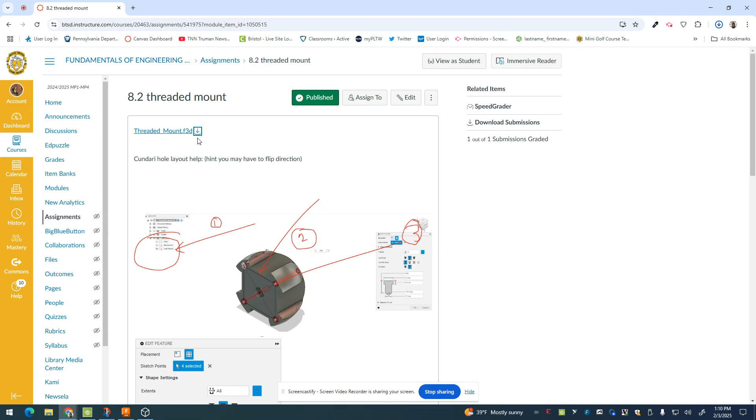This is a Fusion file, so I'm just going to download it by hitting that little arrow. And then I'm going to go through and work on the directions, but I have a couple screenshots here to help us out as we go through, just from doing this before.

So I'm going to go into my Fusion, and I will go into a new, for me, I'm going to go into my admin, and then from there I will upload that file that I just downloaded off of Canvas. So that's going to upload, open the design.

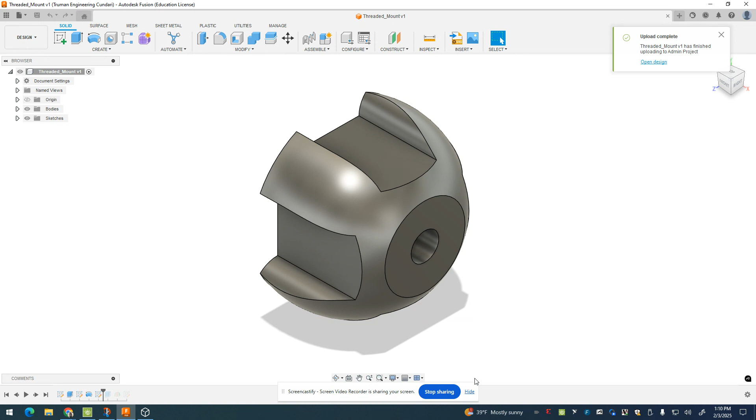So they're starting us off with this, and we need to figure out how to do what they want us to do. They're putting threads and things in there. So, oops, sorry, that's a different assignment, different class.

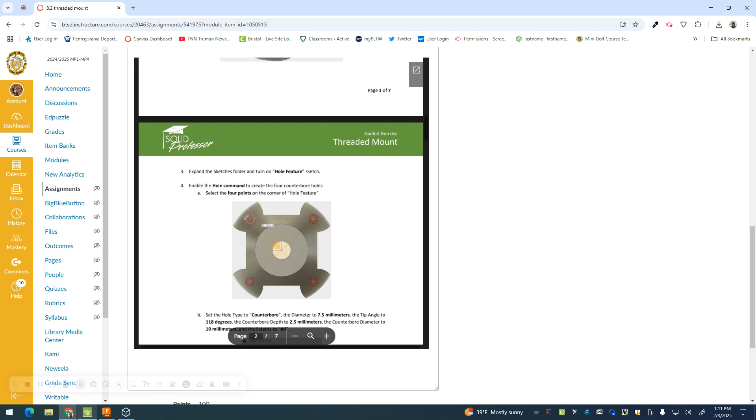Okay, so here we are, and it says upload the design, we've done that. Expand the sketch folder and turn on the Hole Feature sketch. So I'm going to go here, I'm going to bring this down here, and I'm going to go to the Hole Feature and turn the eyeballs on.

And it says select the 4 points on the corner of the hole feature. Set the hole type to counter bore, diameter 7.5 millimeters, the tip angle to 118 degrees, the counter bore depth to 2.5 millimeters, and the counter bore diameter to 10 millimeters. Extends to all. So this whole thing that they have here is a little different physically, which is why I have that screenshot on Canvas.

So let's see if we can sort it out. So we're going to do 4 drill holes, and we're going to do counter bore.

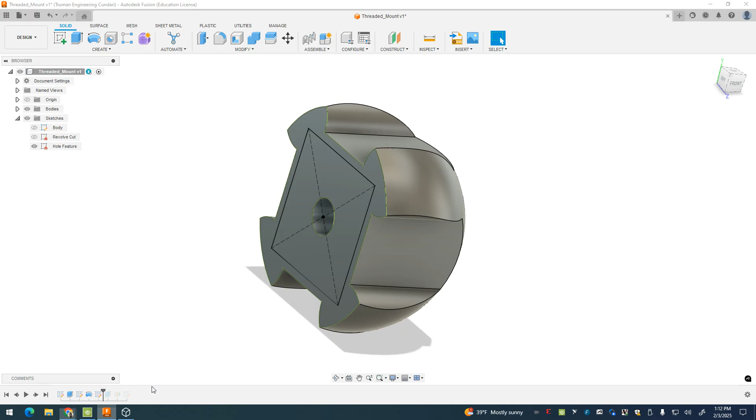So that's kind of the important part right now, is that we go here and we go to hole. We're going to put one here, one here, one here, and one here. So then I'm going to look over at the rules of what I have and what needs to be done.

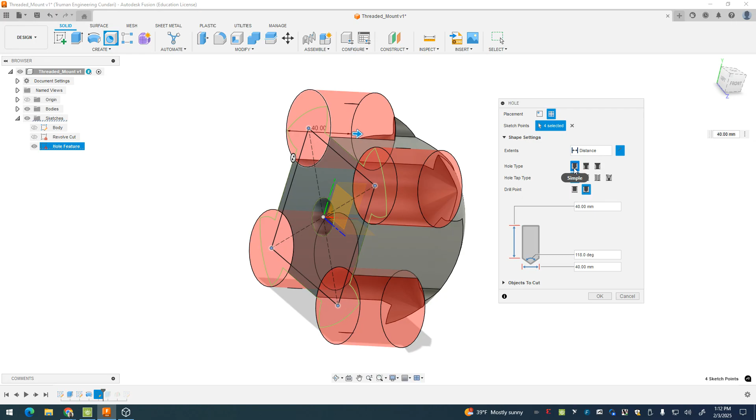So it says we need counter bore. So if I go into this top one here, hole type, simple counter bore, countersink. So let's click it over to counter bore.

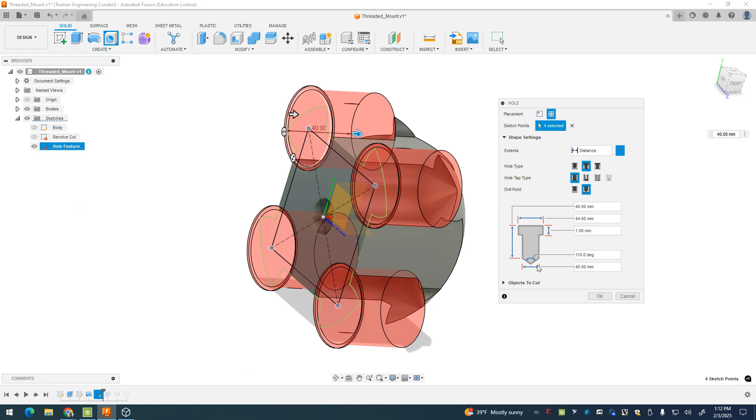And then it says the diameter is 7.5 millimeters, but then the counter bore diameter is 10. So let's do that. So we have this diameter is going to be 7.5. Oops, I didn't mean to hit that. Sorry, double click. Okay, so 7.5.

This diameter here is 10. And then it says the depth here was, I want to say 2.5. Let me just make sure. Yep, 2.5 and 118 for our degrees. So let's do 2.5. Look, this is already 118.

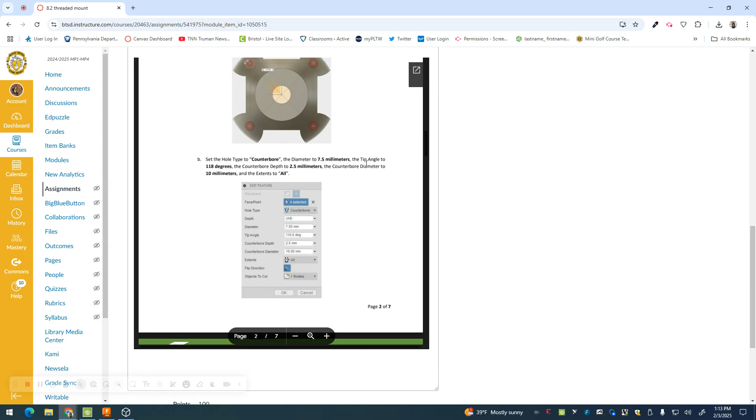So then the only thing I have to worry about is the height of the actual hole. Let's see if they give us one. It says extends all. So that means we're going to go through this part here, drop down. Does it give us an all option? No. There's got to be another place for us to, here. So under extends, we're going to go to all.

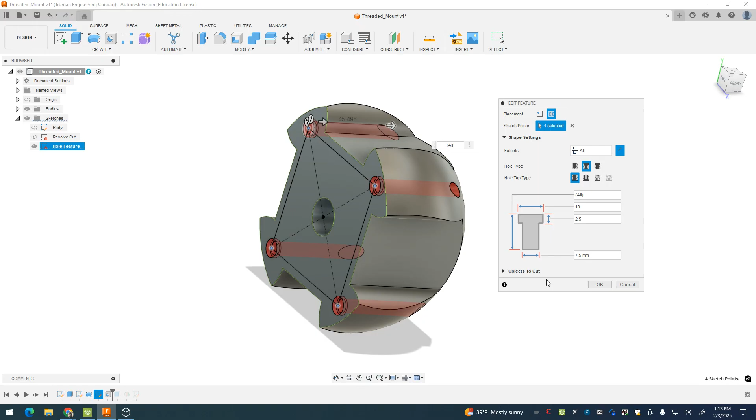Okay, so that is our drill hole there. Anything else weird it has us do? No, that's it. So then it says make sure the command is going in the correct direction, and then click OK.

So that part is good. So now it says enable the shell command to hollow out the underside of the model. Select the back flat face of the mount as the face to the shell. So we're going to go ahead and hollow it out, 2.5 millimeters.

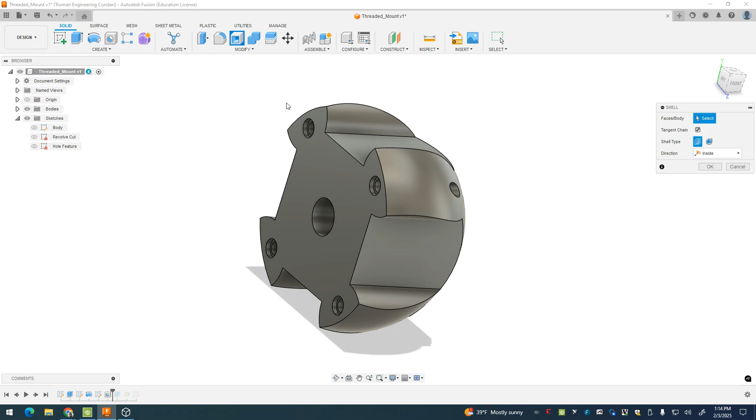So I'm going to go to this thing called shell, click here, bring that in. You can kind of mess with this here and it's going to get mad at you. So just do 2.5 and then it'll be okay. It's because it wants to do like more or less and then it can't.

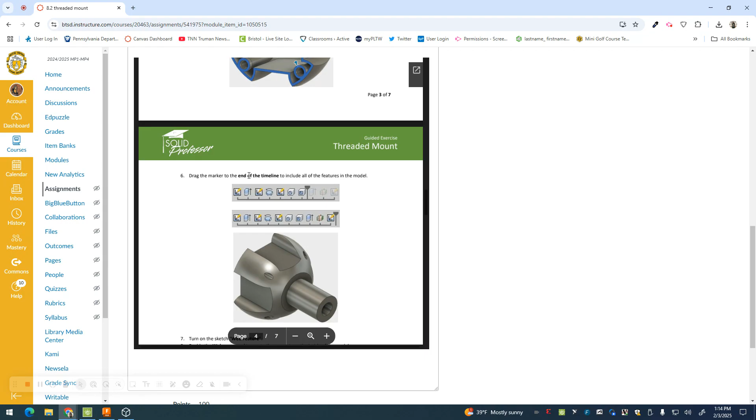How's that look? Yeah, that looks like what they have. Okay, next it says drag the marker to the end of the timeline to include the feature in the model. So that means we're going to go here and we're going to go down here and pull this forward.

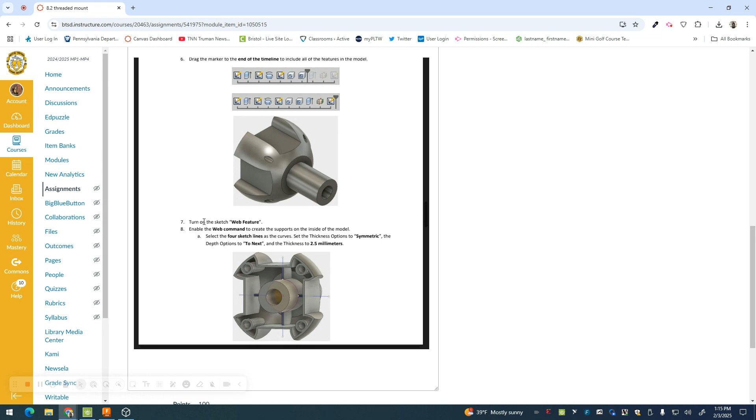Now it says turn on the sketch web feature, enable the web command to create the supports inside the model. Select the 4 sketch lines as the curves, set to thickness symmetrical, depth to next, thickness to 2.5 millimeters. So we're going to go in here and turn on the web feature.

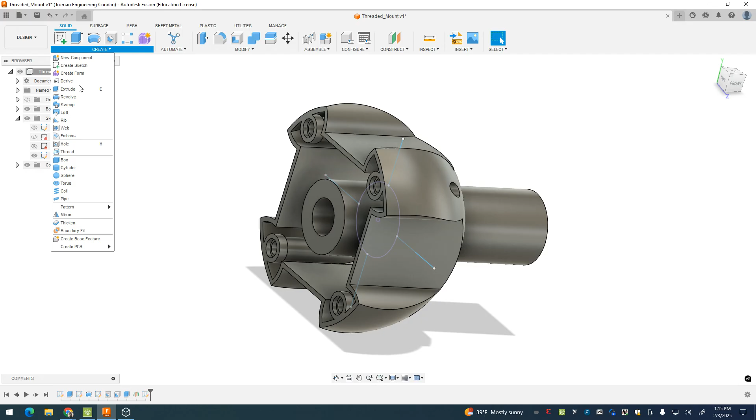We're going to go to web. We're going to roll this so we can see what we're doing. We're picking all of this. I feel like the circle should be picked too, but I don't know if that's the case. And then we're going to do symmetric, and we're going to say to next.

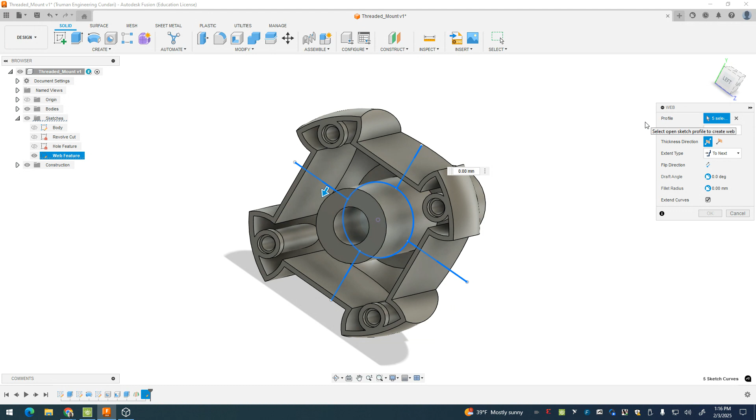And the thickness is 2.5, so to next, 2.5. Okay, is that what it looks like, or did they not do the circle? Let's see, I just don't know if the circle should be included. It says the 4 sketch lines, so that does not include the circle. So let me take that circle out.

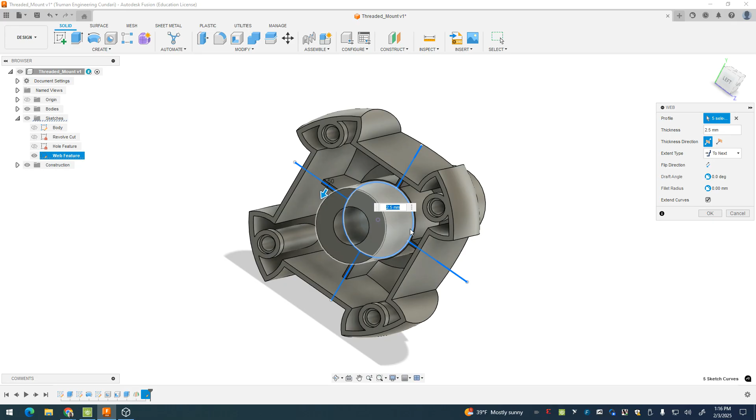So I'm going back up here, and I'm just clicking on that circle if I can get it. Can I get rid of it, or do I have to go out? Let me just do this.

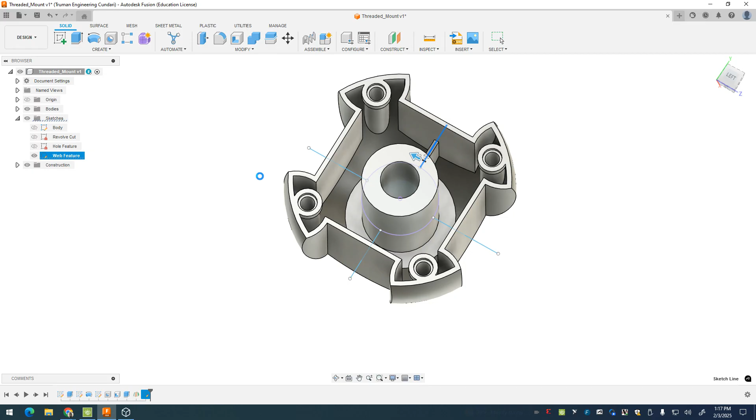Oh my gosh, it's got issues, guys. My computer's frying itself. Okay, let me X out of that. Cancel it because it's lost its mind.

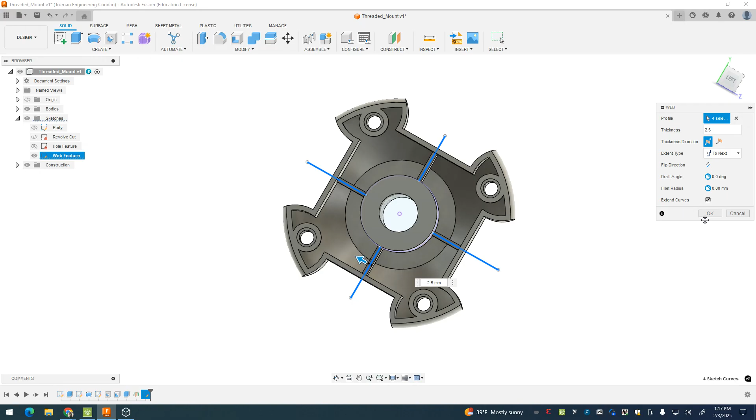Okay, so we turned on the web. Sorry, I'm going to go to web. Put this line, this line, this line, this line. We're going to make it 2.5. Make sure this is symmetrical. Make sure this is to next. And hit OK, that's what you have for that.

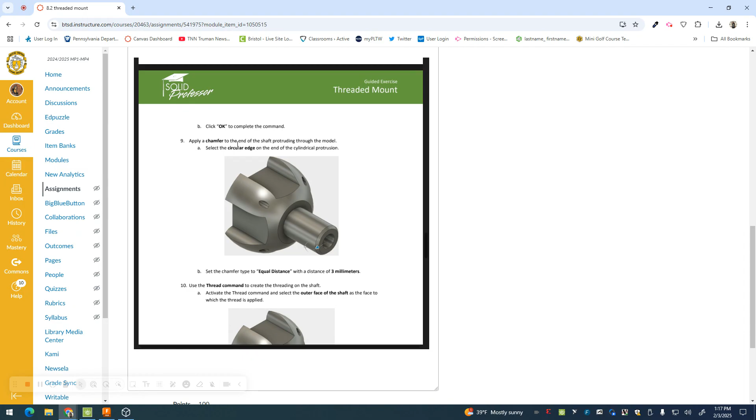Okay, next it says apply a chamfer to the end of the shaft protruding through the model. Select circular edge and make it equal distance 3 millimeters. So here we're going to go ahead and do a chamfer on this side. Chamfer, do this circle, go in 3 millimeters, equal distance, and hit OK.

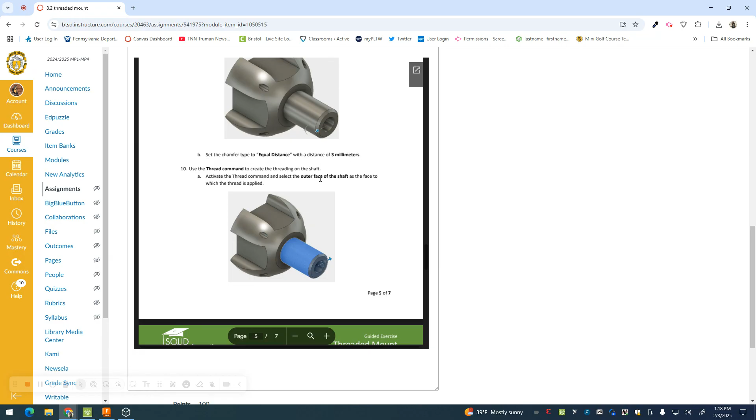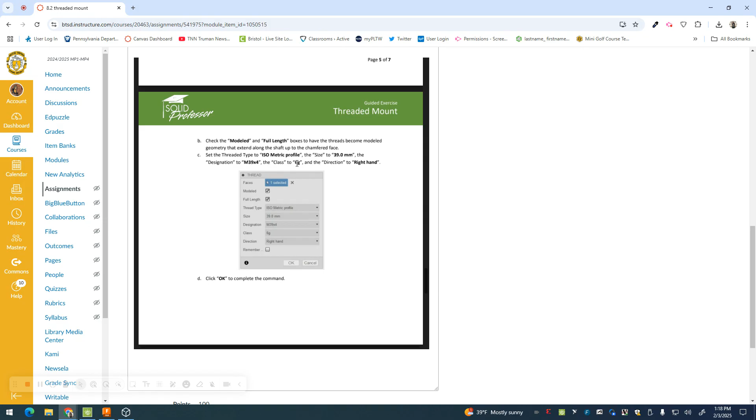Next it says use the thread command to create the threading on the shaft. Activate the thread command and select that face. Check the modeled and full length boxes we want ISO metric profile. The size is 39.0 millimeters. The designation is M39 times 4. The class is 6g. Okay, so let's see if we can sort all this out.

This is the thing, when you do threading, is threading here? Yeah. Picking this, so then it has all those things. ISO Metric profile, I'm going to add modeled. If you don't click modeled, you don't actually get to see what's going on. 39 millimeters, M39 times 4, 6g, right-handed. I think that's everything, probably the last time I did a thread. Yep.

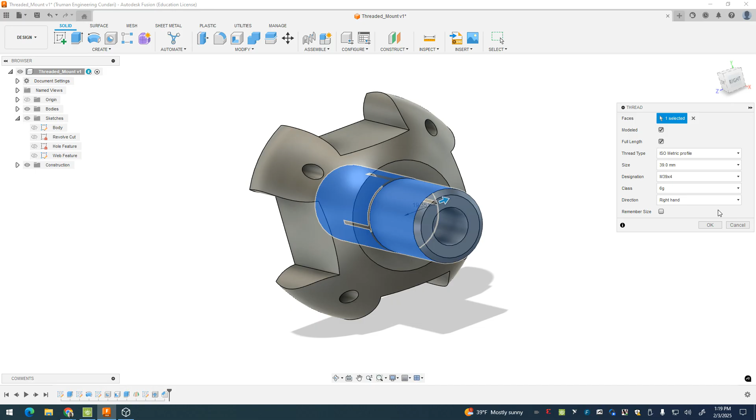So let's look at it. Let's hit OK. And it didn't do anything. That's really annoying. Oh, it did, it threaded the inside and not the outside. Maybe that's the way it's supposed to be, but I don't think so. Let me double check.

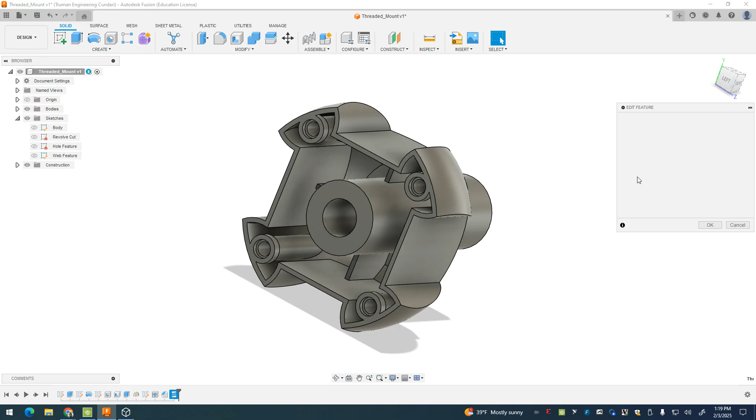So it's supposed to be threaded. We go all the way to the very top. Yeah, it's supposed to be threaded there. Let me go back to my threading. And then, is there a way to... Oh, now it's fine. Okay, so it was a glitch with the computer program. No, it's lost its mind. Good to know.

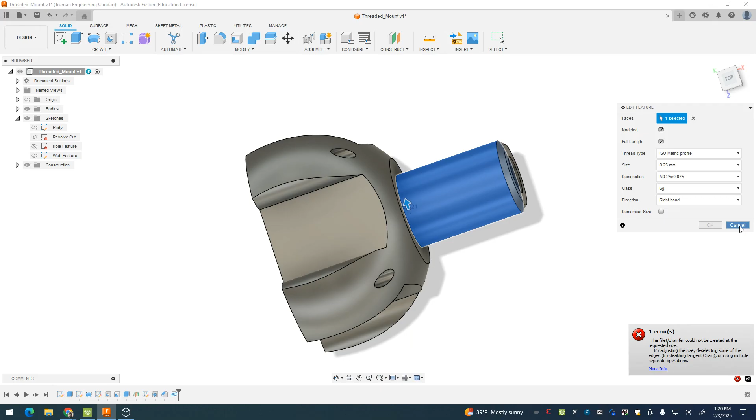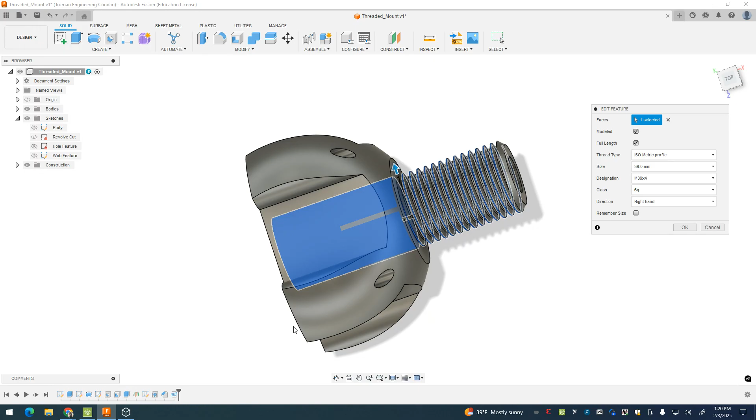I'm just moving this around to figure out what's going on. Obviously that's not what I want. So I did model full length. And I'm going to hit OK. Okay, that time it worked. I don't know, that was weird, I think that was something to do with Fusion and had nothing to do with us.

Okay, so once you have this, it says to make sure you set the material in your body to physical material. Set it to steel alloy, and then we can check it. So we're going to go to steel alloy here, so we're going to modify physical material.

We're going to say steel. What are the chances I have that here already? Probably pretty high. Okay, metal, and then go down to steel. Steel non-alloy, steel mild, steel alloy. Drag it on.